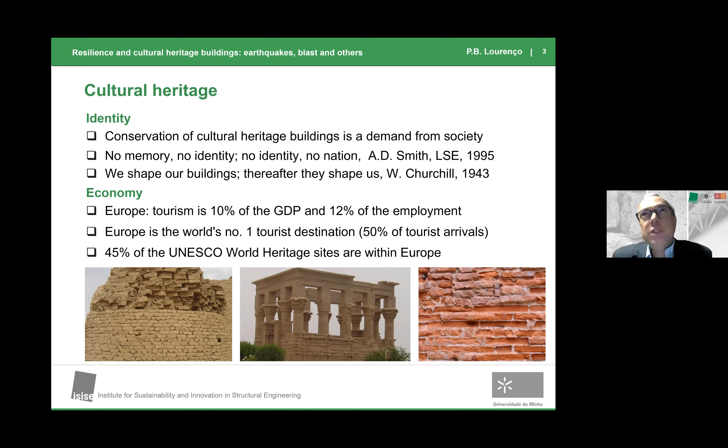Now, of course, we expect life to have a certain time frame, and buildings, particularly if they are not maintained, are at risk. Europe has somehow been the cradle of the theory of conservation and restoration, and of course there are many monuments and important heritage within the European area.

And this charter from the European architectural heritage states clearly that the heritage is at risk. At risk because of many things, including ourselves, because we are often destructive to the environment, including the fact that many of these buildings are obsolete, and because deterioration is intrinsic to life. Anything which is not maintained will eventually die.

Now, there are many hazards that affect our heritage. Many are natural, many are man-made. Of course, climate change is a major issue and depends where we are from. For example, I can tell you that we are working in an important building in Mozambique. They have a cyclone, typically on average in the last 100 years, once every 10 years. Well, in 2019, they had 2 in the same year. This never happened. And since 2019, they had 2 more. And so obviously some areas are much more subjected and will face faster climate change. Also, our destructive power is increasing immensely.

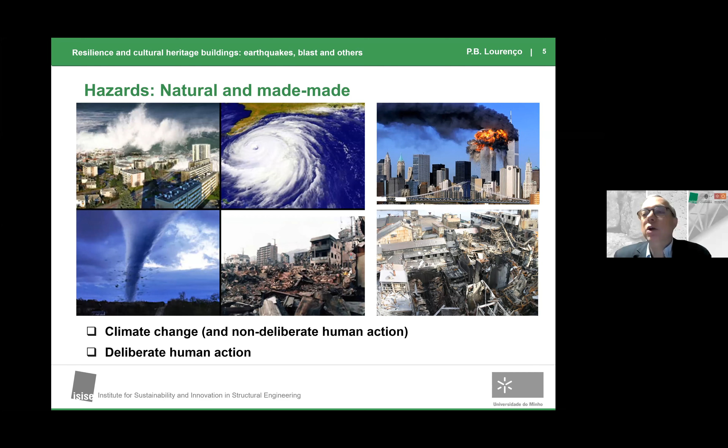Now, I think in the last years, maybe since the 90s, sustainability became the buzzword in our community and across society. I think two other words became very important in the last decade. One is resilience and the other is risk. And they are aligned together.

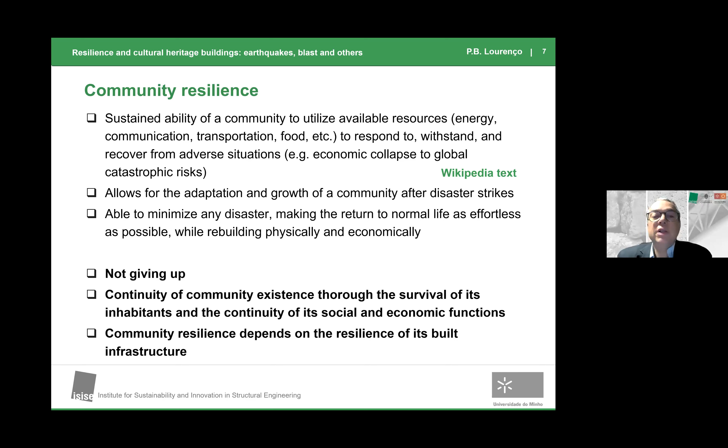Now, well, Wikipedia and the internet as an answer to any of our questions. Community resilience is defined there, and basically it has to do about not giving up, about a society being able to perform. Now, a society to perform depends on the built environment. And the built environment is not only housing, is not only the monuments. Cultural heritage is a small fraction. We're talking a hyper-complex system involving complex infrastructures, electricity, cell phones, gas, water, roads, anything you can think of.

Hospitals, schools, police. And so we have an important problem then where you have a major disaster, normally cascading effects occur, and let's say damage in one system affects all the other systems. And so we have to look at the built infrastructure in a very broad scope and thinking that our one system affects the other.

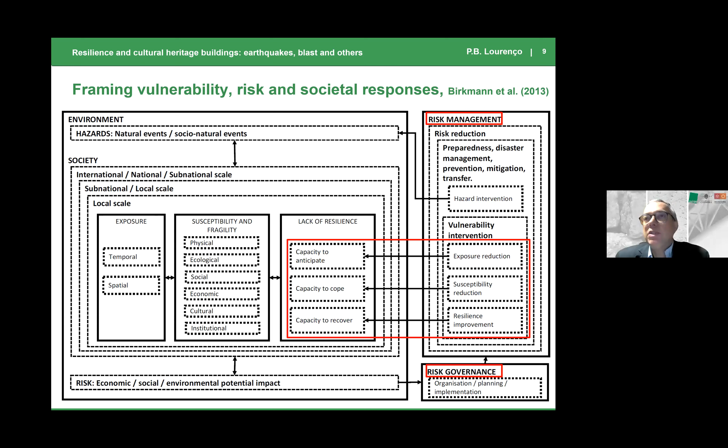And so here you have a link between resilience and vulnerability, the need to anticipate, to cope with the disaster, to recover from the disaster. And all about this is risk management, and something which is very important implies, as a society, risk governance. This means that our politicians, it means ourselves as a society, need to consider that in order to have resilient societies, we need to manage appropriately risk.

Now, risk is a very complex concept because people often mix risk with hazard, and people often present risk in a different context. Engineers, I am a structural engineer, try to look into risk as the product of three things: hazard times vulnerability times exposure.

It's very difficult to change the hazard. For example, obviously, well, you can reduce the earthquake hazard like you're doing, I understand, in your governmental buildings by installing base isolation. It's very expensive, it's probably impossible to apply to all the buildings. Well, we can change the hazard, obviously, for example, against flood or against blast by introducing protections. But in general, hazard is difficult to reduce.

We can also change exposure. For example, we can move people out of the building, limit capacity, and say this building cannot take 1,000 people, but only 100 or 50 or 10 at a time, so that people can escape. And if there is a strong event, you have lower impact. Or you can move, in a monument for example, the expensive statues, the amazing unique paintings somewhere else in a museum to protect them by reducing exposure.

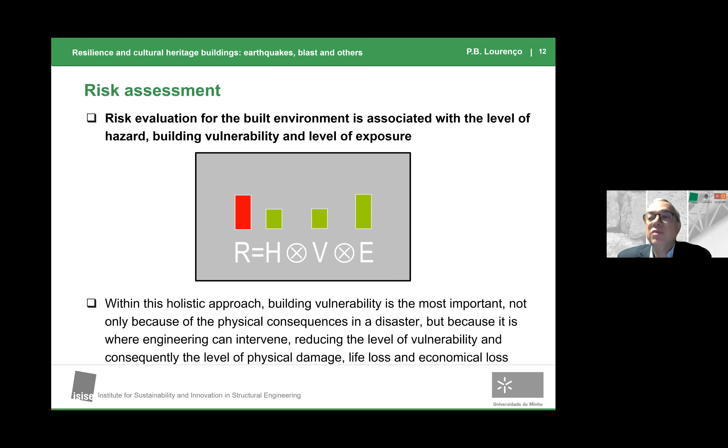This is exceptional. Most cases in engineering, we need to address vulnerability. And so reducing risk means reducing vulnerability. And there is an almost direct relation in this process. Now, there are many different tools, and you cannot use the same tool for a building or for a country or for the world. I will talk about this very briefly in a very fast way. Some of the slides I'm going to show you are extremely fast.

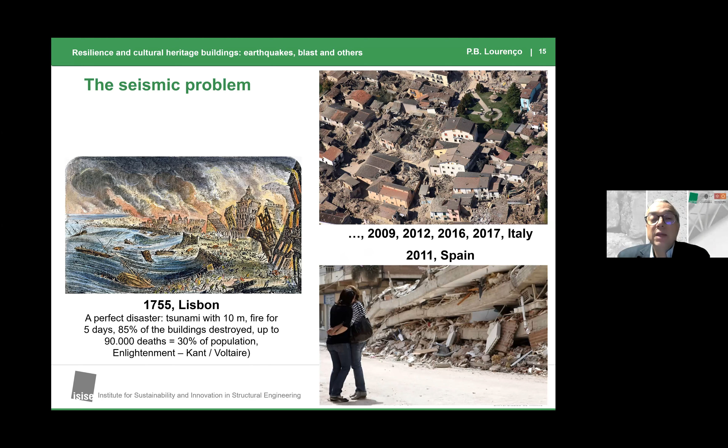Basically, what you can see is that we have normally rather poor materials. We have local failures because the material disintegrates, because it's not of enough quality. We have many elements that collapse out of plane because they are not properly tied back to something.

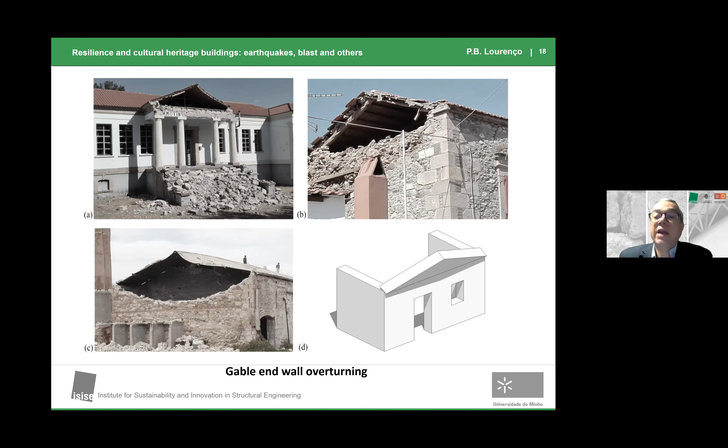We have areas of the building which are much more vulnerable, for example a corner. When an earthquake comes from both directions, you are pushing and pulling the walls at the corner, and this expels the corner outside. These are the typical failure mechanisms: buildings tend to collapse out of plane, killing people inside and outside, and this happens extremely fast.

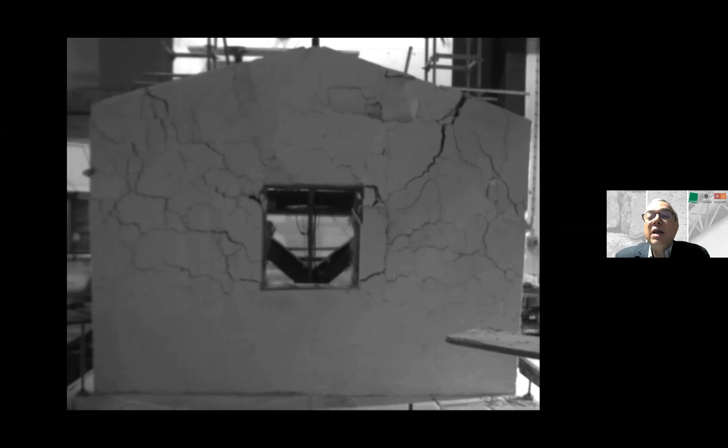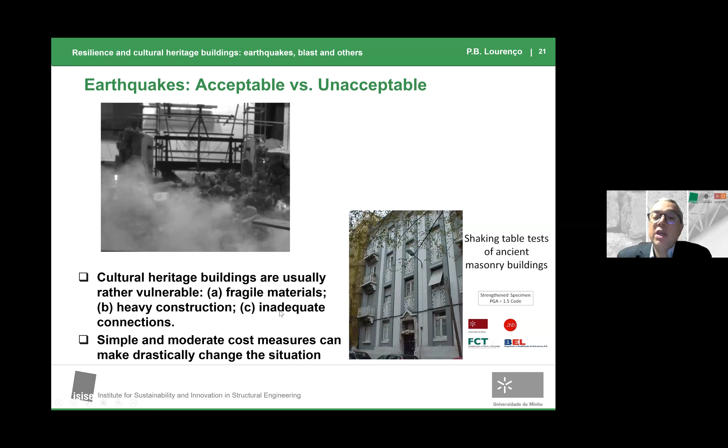If you have a very vulnerable building, like this example on a shaking table, and an earthquake comes, you have nothing. If you do nothing, because the building is heavy and fragile, conceived only for gravitational loading, you have a disaster.

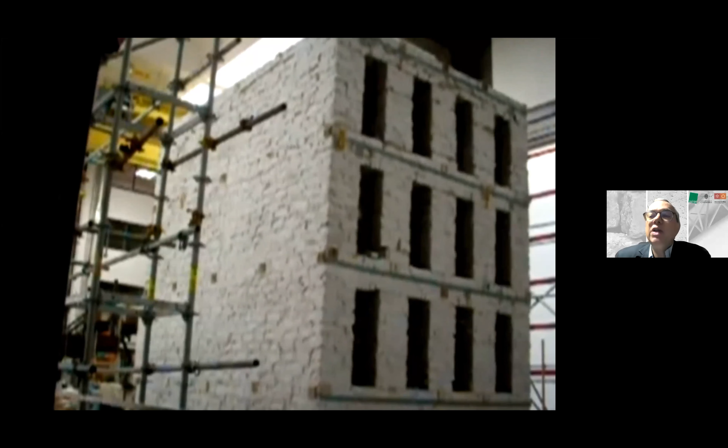It's very simple to do better. This building has been done better. We tied it properly to the floors, strengthened the floors very lightly, and made it much safer. This building was tested before and after repair, and we increased its capacity about double through a very simple, unexpected, and non-costly intervention.

Structural engineering is about saving lives and having an acceptable risk. This is a major earthquake, and the building is obviously destroyed—let's say not repairable—but it doesn't matter, because for this very large, unexpected event according to the code, the building survived and protected property and people inside and outside.

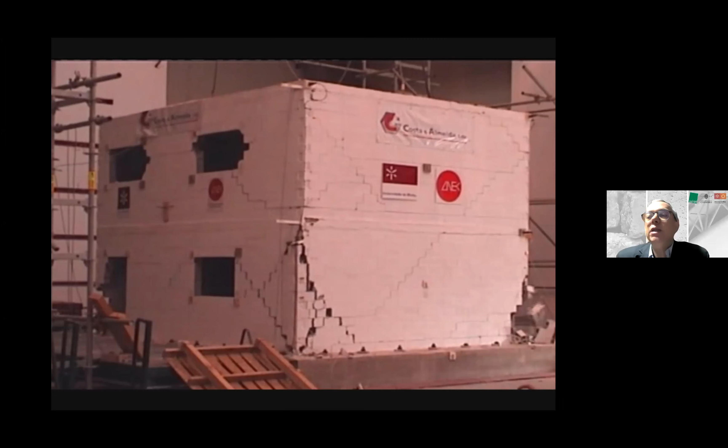Now, another type of extreme event is blast. Blast can happen because of negligence or because of a specific target action. Very fast loads can come from impact, from a boat, from a car, or from wars. This is an example of a test that takes a couple of milliseconds—it's a very fast test.

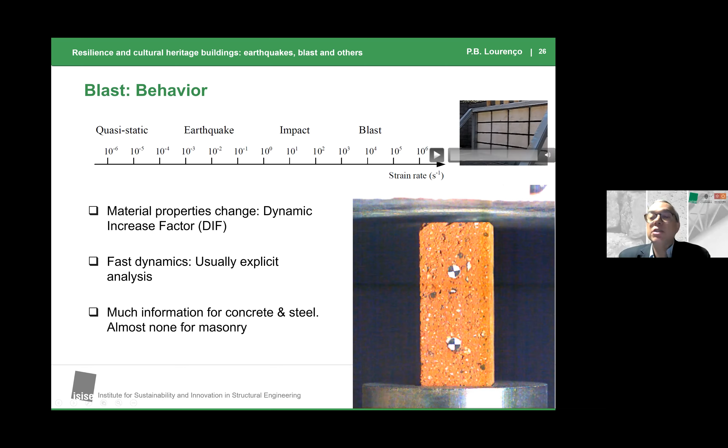This is very exciting from a structural engineering point of view, because anything you know about earthquake engineering and static loading—loads that change very slowly—you cannot use. You need to change everything: your tests, your analysis tools, and the way you think.

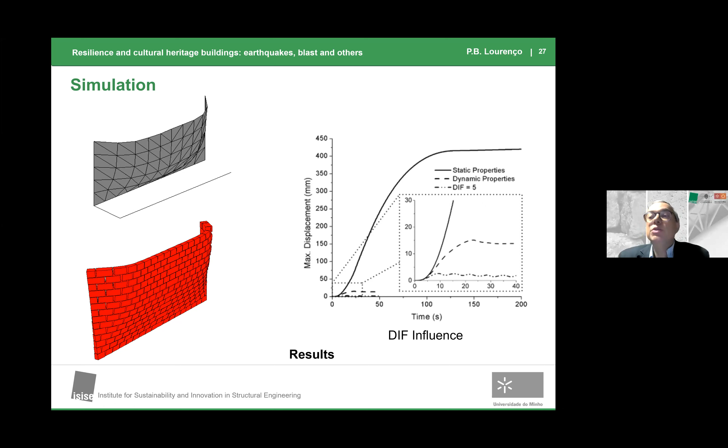For example, this is a famous factor in blast analysis, an increase factor taking dynamics into consideration. Taking the static properties normally used in structural engineering gives you the black line. Changing to the correct properties changes this line, where there's a permanent deformation in this wall of about 15 millimeters. Changing to totally wrong properties gives no deformation. So the response is extremely sensitive to the speed of the blast and how the building and material respond to this speed.

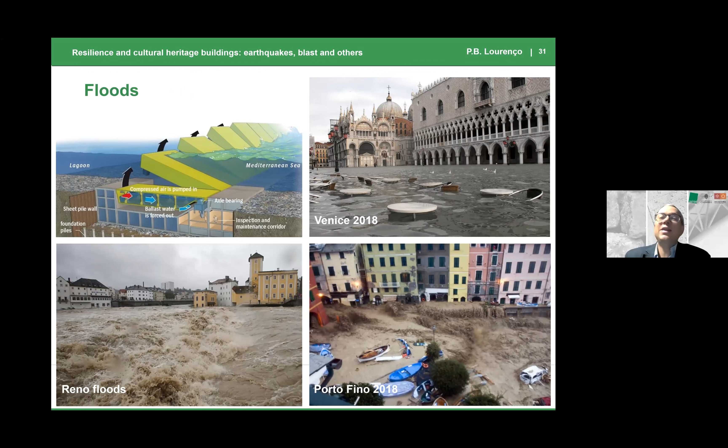Now, earthquakes are not the most expensive disaster, but they are the ones killing more people, and they tend to kill people very fast. If you have 200,000, 1 million, or 500,000 people killed within a few minutes or hours, this is not acceptable for a society.

So we have to do something. It's also very interesting to see how society responds to some of these things, because society in general believes landslides are not a big issue, or floods, or fires, or earthquakes.

But they think, for example, terrorism is a major risk. Here you can see a barometer in Europe saying that 90% of the population believes terrorism to be a major risk. And you can see that the chance you die of a terror attack is very similar to the chance of being struck by lightning. And nobody is concerned about being struck by lightning, okay?

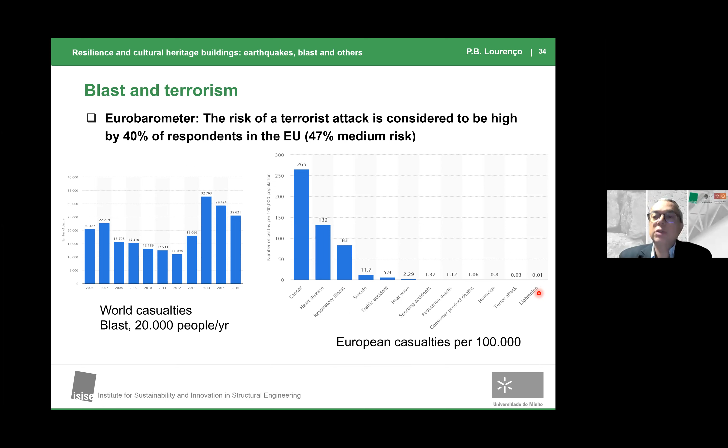So you can see how society, all ourselves, respond to social media and incorrect perceptions of risk and incorrect perceptions of threats. Now, another important issue, in my view, from the engineering point of view, is the economics.

And disasters tend to be terribly expensive. When you have a problem in your house, this becomes your problem. When you have a problem in a major disaster, this is a societal problem, meaning we all pay for it. Anybody who is a taxpayer is going to pay for it. And this is becoming impossible to pay.

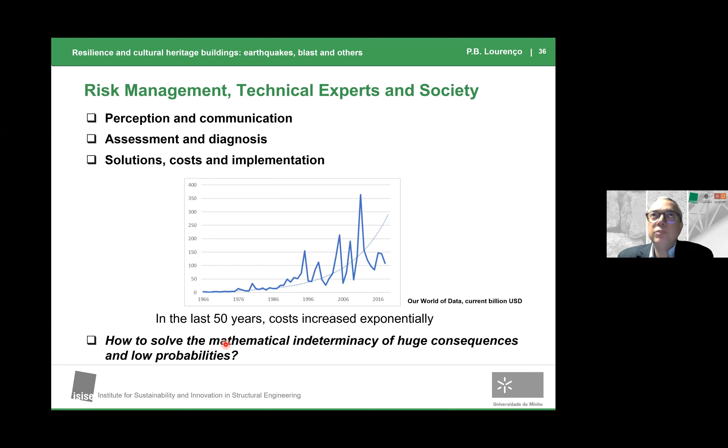So we need to do better in protecting our world heritage, in protecting our societies. We are failing to address the increasing exponential costs of losses, okay? And we have to solve this very complex problem from an engineering or mathematical point of view, how to combine a very low probability or values close to zero with huge consequences, which means costs and losses close to infinite. And so this is an indeterminate problem, very difficult to somehow transfer the information to society.

Now, the good news is, from the engineering point of view, we know a lot. I think that in recent years we progressed in traditional materials as much as we know for modern materials like concrete or steel. I think we know almost everything at all scales, from the nano to the super big.

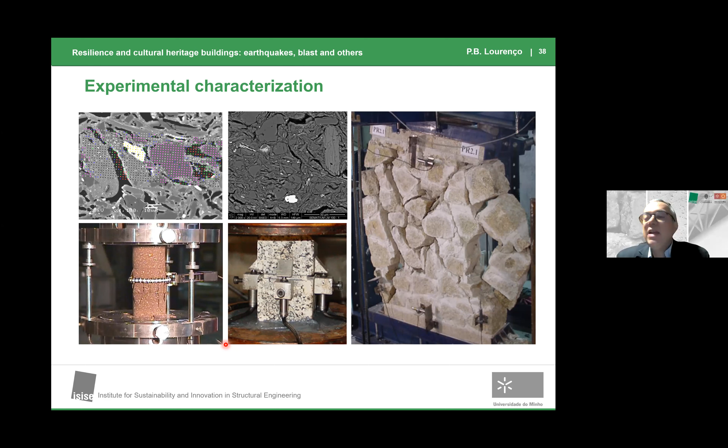We have amazing tools today with drones, with laser scanners, with inexpensive, easy to use, amazing software that allows me to get the 3D model very fast. We have amazing tools that are very similar to what we use in medicine. We can sense a building that our hands cannot sense. We can hear a building, we can see a building that our eyes will not see. So we have amazing tools that allow us to characterize the condition.

How good is the building? We have more and more inexpensive tools to monitor. Everybody has an accelerometer in a cell phone. This is why the phone knows up and down, or where north is. And this is very inexpensive. You can have a triaxial accelerometer for a minimal cost.

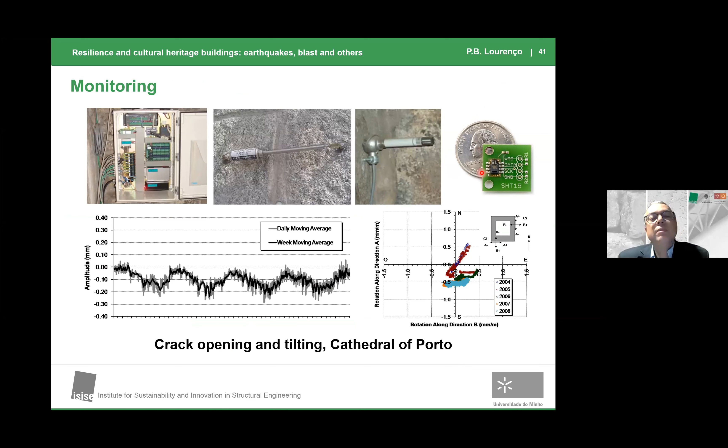And we have amazing tools to simulate in our computers anything we need to simulate. Sometimes we don't have enough data, it is true. Sometimes we don't have enough money to study carefully. This is also true. We have to make choices, okay? But this is pragmatism, this is engineering. Engineering is about making choices, okay?

And we have new exciting materials that are appearing every day. Sustainable materials, new materials that did not exist several years or decades ago. And so what we try to do today in structural engineering of the built heritage is to combine empirical evidence, things which are more on the qualitative side, and our experience from observation, with hypotheses that we put in sophisticated models to come to a conclusion.

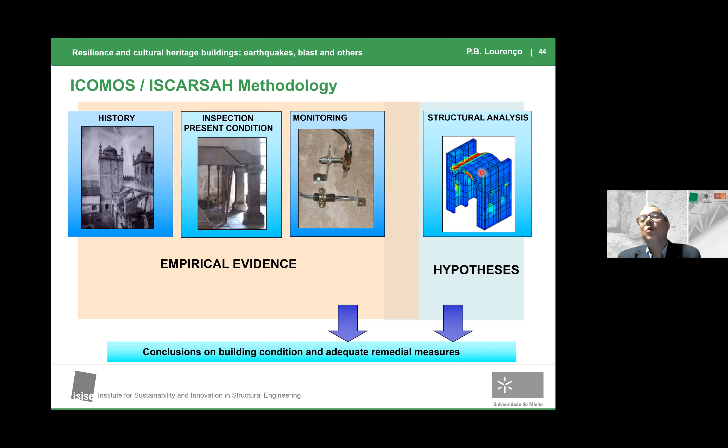And this is quite different from modern engineering of modern buildings, where everything is known, or most of it is known. In an existing building, a lot of it is unknown, meaning we have to address uncertainty, meaning we have to consider things which are based on our experience, based on our judgment, okay? So we have basically 3 steps: understand the building, understand the causes, address safety, is risk adequate or not, and then design measures if necessary, okay?

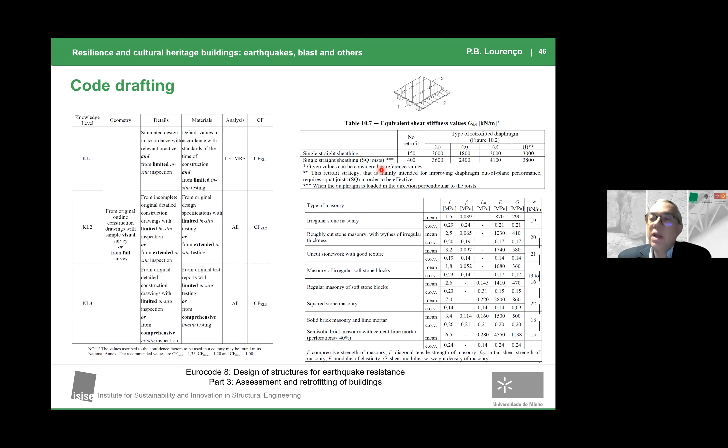The good news is that the codes are going in this direction. We have a lot of information available. I'm putting here an example of the new code coming up in Europe in the next 2 or 3 years for existing buildings. Everything is there. We have information about traditional materials. We have complex information on how, for example, a timber floor works. So there is information available, information we can use safely.

Now, there is also a lot of things we don't know because they are complex. And this is why we still need research. And of course, why research makes sense, to contribute to what we call a wealth-based society or a knowledge-based society, and to innovate, bring new products.

And this is the base of a very large project that we're running now in my university, where we gather the best experts in the world, I believe, or some of the best experts, and we ask them to do a blind prediction on this building.

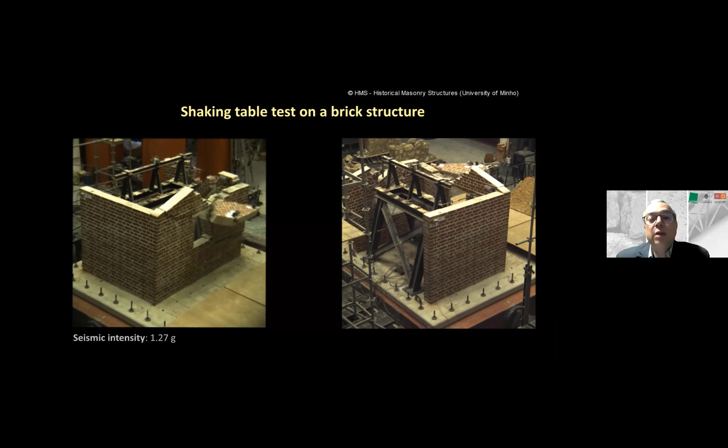It looks super simple, and it is simple. It's one facade, two return walls. You could see there was an earthquake, there is a shaking table moving, and you could see that failure is extremely fast, it's really fast. It moves and it collapses.

Now, if you look at failure in slow motion, things are a little bit different, and it's really amazing how this behaves. You can see that it starts to go inside, and there is a beautiful V here going over the lintel, okay? So there is a crack, and this part is going inwards. Like when you brake, your body goes to the front in your car. When you accelerate fast, your body goes to the back.

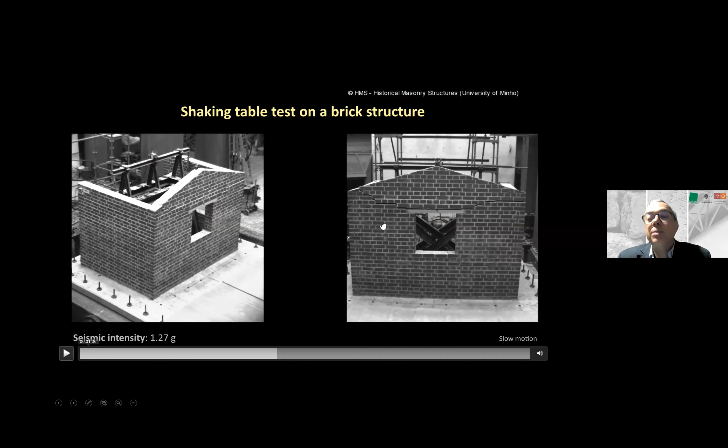This is an inertial force. So this part, the gable, is going backwards because of inertial forces. Now, when you continue, it's going outside, you can see the V maintains, it's almost collapsing, not yet. Then the V opens again, and now it's going to collapse almost all, but no. And then in the end, it only collapses a part of it, and it continues.

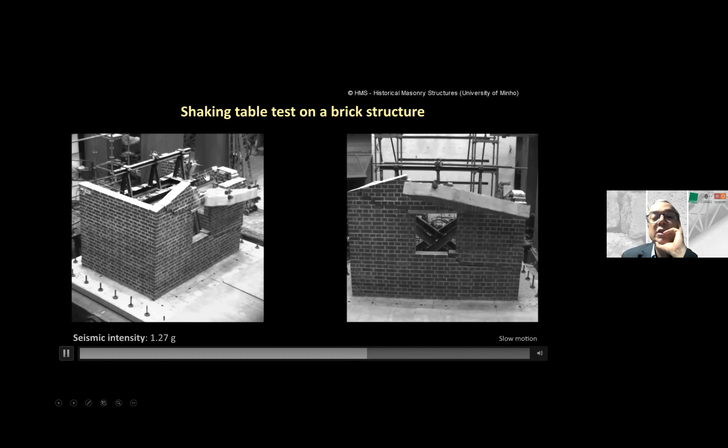And when it collapses this part, it also collapses the back, as you can see. Oh Jesus, doesn't matter, and it's super fast, okay? So the end point is that it collapses the front, the back, and it's super fast. The pier almost collapsed, but it's not collapsing. And this part is going to collapse next.

So as you can see, this is a fraction of a second, and it's very brittle. Something structural engineers hate. We want ductile failures, failures which are safe. We tell people this building is unsafe. You can prop, you can do something, or you can run away.

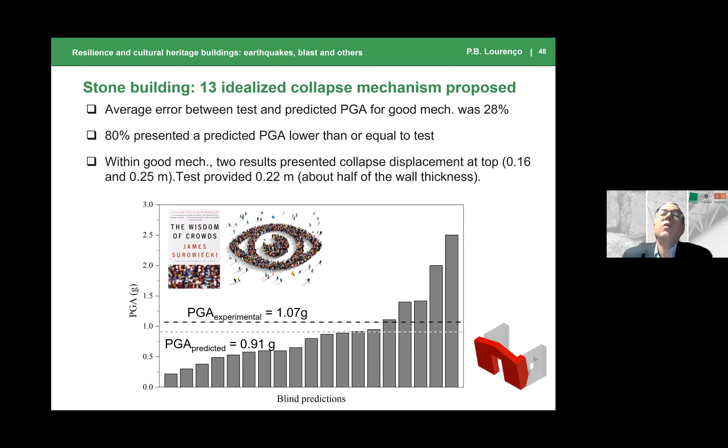And so this is very difficult, even from the mathematical point of view. As you can see, the experts were excellent on average, because the average is very close to the experimental, but they were a nightmare in terms of predictions. It's not really a nightmare. The good news is that most of the experts, 80%, predicted safe solutions. And so engineering is not perfect, is not in the case of dynamics of these very brittle responses, but we are on the safe side. But we need to know better.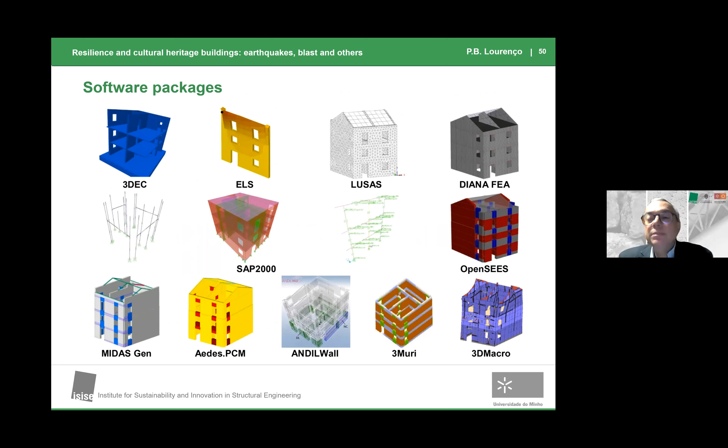We did another example. This is more professional oriented. These are several commercial softwares, several of them widely used in engineering, SAP 2000, OpenSees, okay? Others less used in engineering. And we tried them to analyze two buildings. The results were not very good.

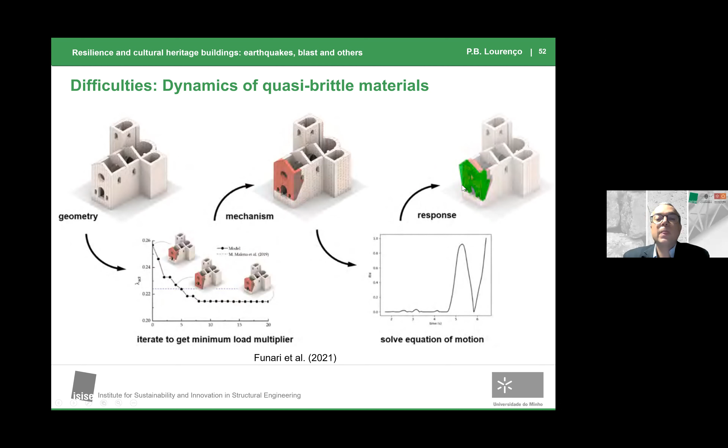This is the way we're trying to go in the profession. We would like to have mechanisms that change this complex system to a simpler system, and then we apply dynamics here. And here you can see the difficulties we have from the engineering point of view. This is the code application of dynamics of these systems.

The codes in Europe allow that you adopt a force-based or a displacement-based approach. Problems: a force-based approach is dumb. It doesn't consider the scale effects, and so it doesn't matter if the building is small or very big. And if you use a static approach, the response is always the same. We know this is profoundly incorrect. And in dynamics, if you do it displacement-based, the capacity of this structure depends on its size. And so a small structure and a large structure have different safeties.

Now, interesting aspects also. If I go back to this building and now instead of doing a code-based analysis, I use random earthquakes, both of code type or based on databases of earthquakes across the world, so that on average, I try to replicate the code, I see very nice things.

And the very nice things are, again, we are predicting on the safe side, because I'm showing you here that all these predictions, the black and the white, doesn't matter so much. They are all on the safe side. Very few predictions are unsafe according to the code. No prediction was unsafe if I take the real failure of the building.

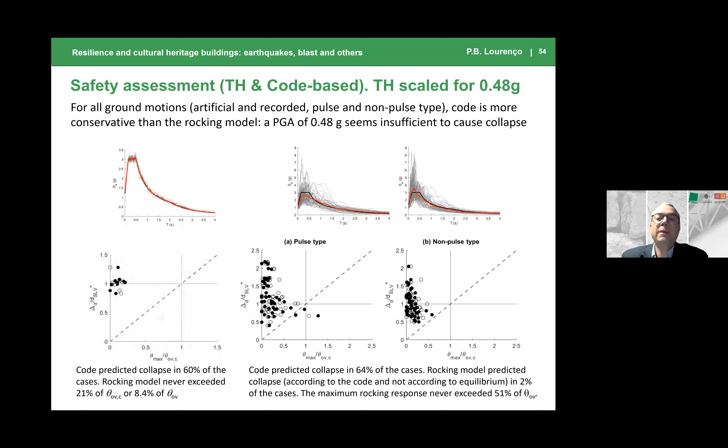Again, we have problems in dynamics of these types of buildings. This is a church we work on in Cyprus. Well, this is a bit sophisticated. I don't want to go into any sophistication.

We did the measurements in the building. We did the model that replicates the existing building. We applied the code, and by applying the code, we are able to calculate what is the target displacement for different scenarios: almost no damage, the standard damage of the code, or full collapse. So this is a code analysis, and this is a more sophisticated time history analysis, the best representation of the earthquake.

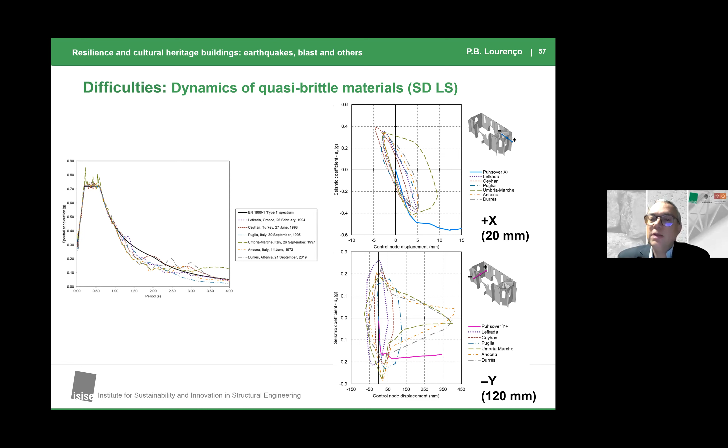You can see that the code will tell me 20 millimeters here, and 120 here. As you can see, at the peak I am at much lower values, so again I'm on the safe side. This is good if I'm on the safe side using more sophisticated tools, but this remains a true challenge for structural engineering.

Dynamics are really complex. Now, I try to somehow balance our activity between research and practice, and research is supposed to feed practice. Of course, many things we do in research we cannot apply in everyday engineering, okay? We are lucky to apply very sophisticated tools in very sophisticated case studies.

This, for example, is a building in Isfahan where we worked. It's an amazing building. These double domes, of Persian origin, are extremely famous from the point of view of building technology, shape, and architecture. You can see it's a bit of a complex structure because you have...

...these stiffeners inside. What you see here is a masonry stiffener, these elements. The masonry stiffeners are critical for the response. If you don't have it, the structure is rather...

...unsafe. You can also see that the conception of the space is very different from what we often associate with the Western world. We tend to have super huge buildings that impress from the outside, so you have a demonstration of power, but then the building also impresses you from the inside and makes you feel very small. Whereas in many other cultures, this is an impressive building from the outside because of the scale, but inside they are very small.

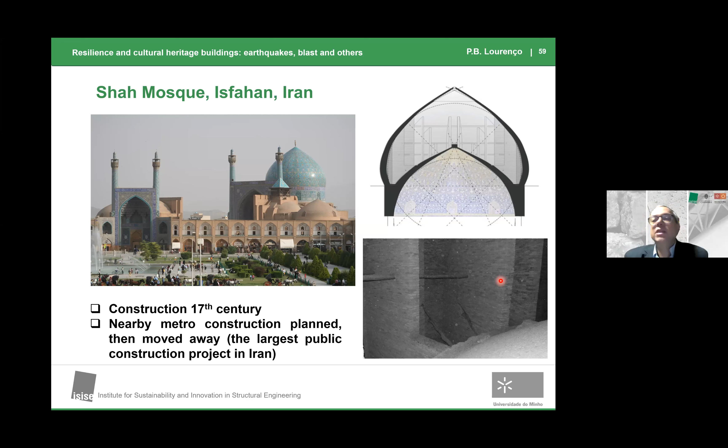This is another interesting example where we worked together with Professor Mario Santana. I think he's here, I'm not sure, it's a small photo, but I've met him in many places across the world. This is a very interesting aspect in earthquake engineering.

There was a low or moderate size earthquake in 2016. As you can see, it was minor, very few buildings damaged, okay? Four people killed, which compared to very large earthquakes with hundreds of thousands killed is a relatively small human loss. For those more linked to earthquake engineering, you can see some accelerations, and they are super small—0.08G, which qualifies as a low earthquake, okay?

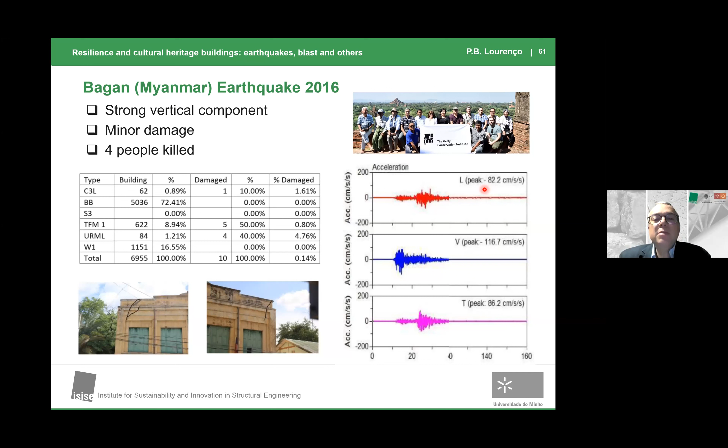But the impressive thing is, if you haven't heard about Bagan, Bagan is the temple valley. It has, I think, over 3,000 temples in the valley.

There was a huge destruction. And even though there was very little damage in most housing, the temples suffered huge destruction. Why? I believe because of dynamic amplification that affected only this type of building. Again, you can see why dynamics are so complicated.

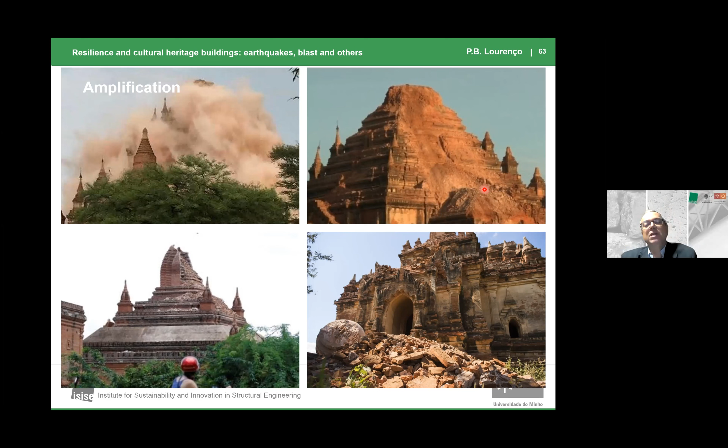If you do statics, you'll never get this, okay? These are some studies we did to try to discuss the failure of these buildings, with many measurements done on site, to see how it could have been possibly strengthened.

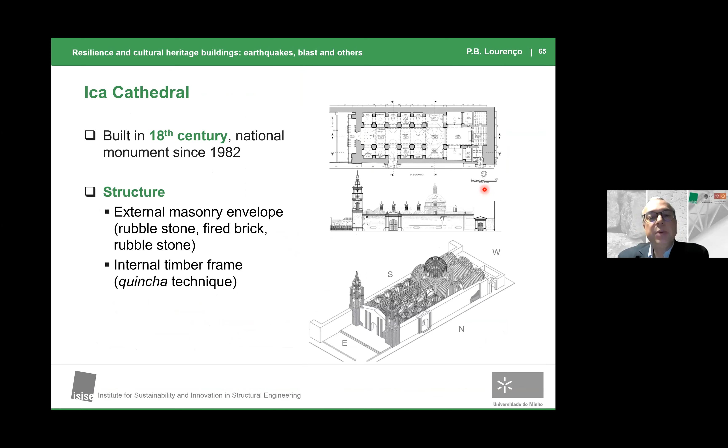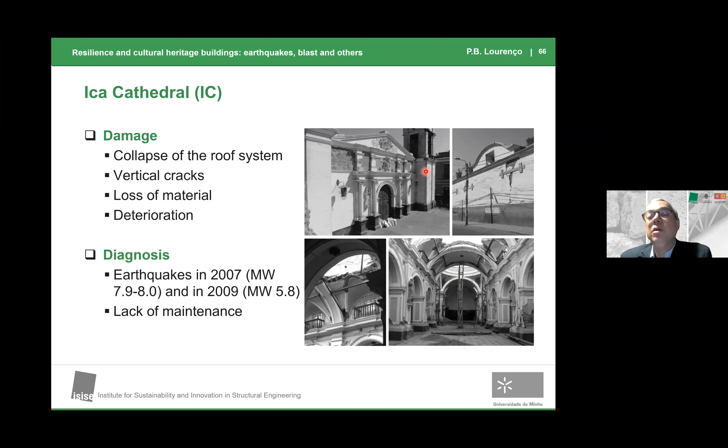Another example of a building that is going to start strengthening, I believe still this year, is the Ica Cathedral in Peru. It's a building that suffered 2 earthquakes, quite strong. There was a lot of damage, so the main vault basically vanished. The dome basically disappeared. The tympan is totally strengthened because it had major cracks.

But people here asked me one of the most difficult questions I've had to answer: why do you want to convince us that we should repair and use this building, which clearly is not safe? And why shouldn't we have a new building, which is as safe as all the other buildings that we're making now?

It's very easy for anyone to say, well, you can use the building, I'm doing it, I go away, it's not my problem. But the question is different: can we accept people to use buildings with a very low safety level? My vision is clear. No, we have to accept a minimum level of safety. Otherwise, we cannot be responsible for the building.

So we did our best, and we believe that this building has a more than acceptable level of safety for modern use. We made many simulations. The interesting part is we are able to move from the unstrengthened model, which has this very fast collapse, as I showed you before in the video - this will collapse, and then part of the building will collapse - and we can move it to a building that has a global behavior where damage occurs if there's a very strong earthquake.

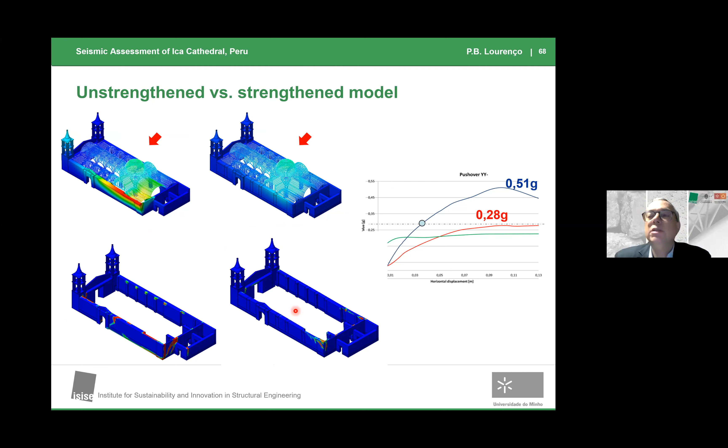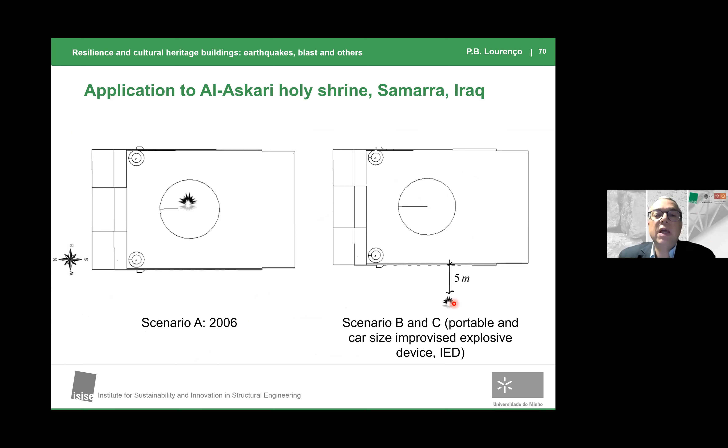This is another example of a building that we worked on that was attacked by blast twice. What we tried to do was justify the damage here, and we could justify it. Then we defined the minimum distance we have to ensure for the building to be safe. It's impossible to make the building safe to anything, but you can make it safe for a car-size explosive by providing a certain distance to the building.

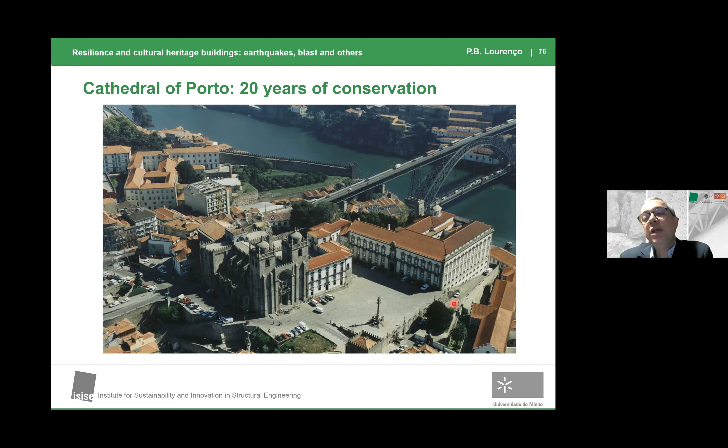Now I'm going to show you fast a couple of applications. This will be a video, so super fast. This is the case study I worked longest. I presented when I was in Carleton. It's the cathedral of the city I live in. It's a very interesting building, has been around for 800 years, of course, with many changes.

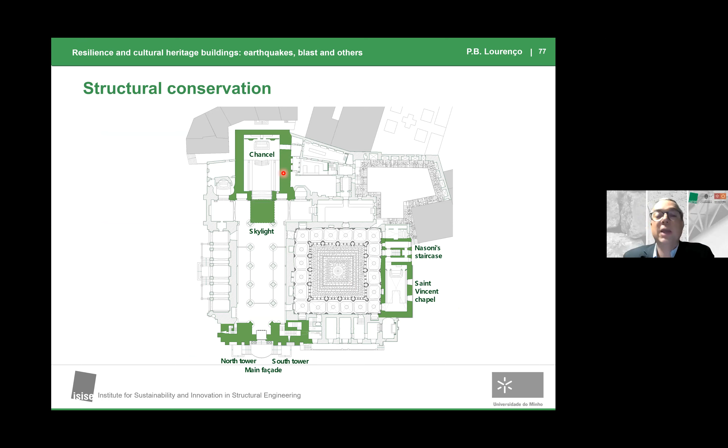We have been lucky to be sort of appointed as the structural engineers, and we worked on many different places across the years. The last works we did were here, and I mean, last is really last year, so it was super recent. I'm going to show you a few examples very fast.

So this is some inspection of the towers. This is the constitution of the walls - these are very thick walls, about 2 meters. The walls are made of 3 leaves, and so there is a big core, and the connection between the external leaves is impossible - they are too big, and so it's very bad, in fact.

There were huge cracks. This one is 25 centimeters, I can put my hand, my full hand inside, and I don't reach the end. There are many cracks, a lot of bulging, ties broken from the past, and continuous movement, because we can compare with old photos. So the situation is not very nice.

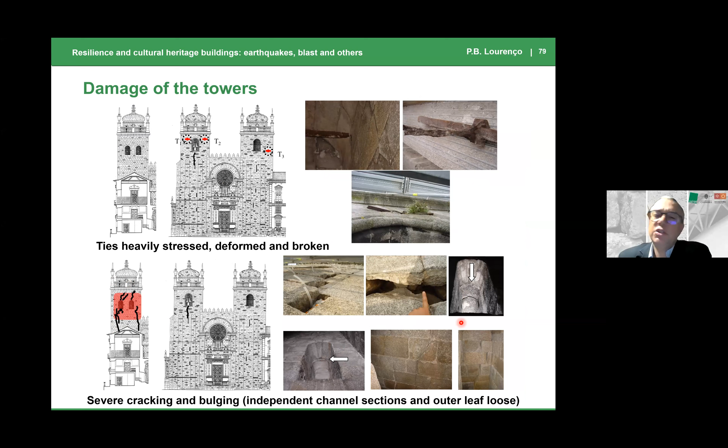We introduced a system of internal rings connected by ties to the outside, so the system is partly invisible. There's a few crosses in this wall that was a disaster, and a few plates that are visible. We tied the wall from inside, and we tied the tower from inside.

These are some examples of the execution, I won't go into many details. These are modern materials, all stainless steel, the most expensive, with injection tubes to inject material inside the holes for proper bond. What I found amazing here is the Lego-like construction an engineer has to think of. It's easy to put in a drawing.

The problem is how we're going to build it. So we designed a system where the parts were small enough to go through the window or the door, and it could be built inside without difficulty. Everything was pre-designed, everything was bolted, there was no welding on site, zero. These are some details of the execution of the elements.

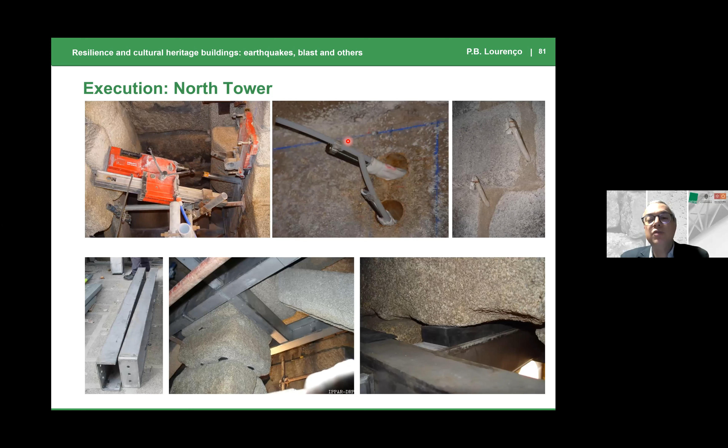I liked this book very much because, you know, he is now the Patriarch of Lisbon, one of the few cardinals and patriarchs of the Roman Catholic Church, a very important position. And he loved very much the crosses of an engineer, and he put them in his book. So I think our things should be visible, and of course, they should be pleasant.

Now another example of our detective work, briefly. This is in the same building, the skylight, which is a bit damaged, not going into details. There's a few cracks, a little dangerous too, because there's no support for these stone slabs. The detective work here is, why do we have this damage?

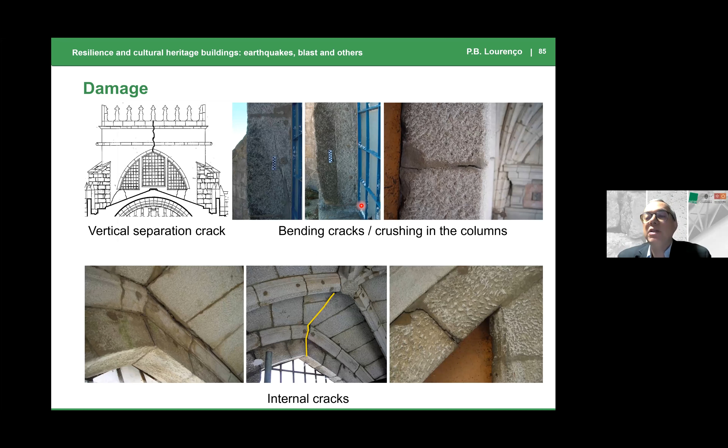We did many analyses: self-weight, no damage. Additional infill, because there's a lot of rubbish people put in buildings if nobody sees, no damage. Temperature effect, almost no damage. So where is the damage coming from? This is what we have to do as engineers of the built heritage: detective work.

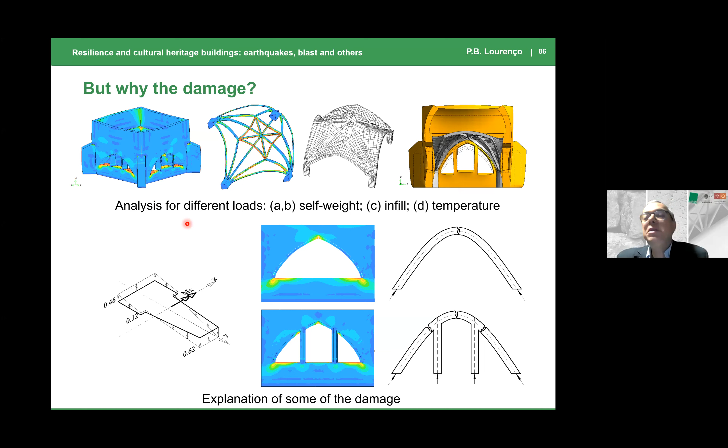Then I started thinking, this is not the problem of the transept, this is the problem of the building. In fact, because the foundations are poor, the problem is the foundations, and it is the foundations that destroy the upper part. Once we know this, it's very simple to decide what to do.

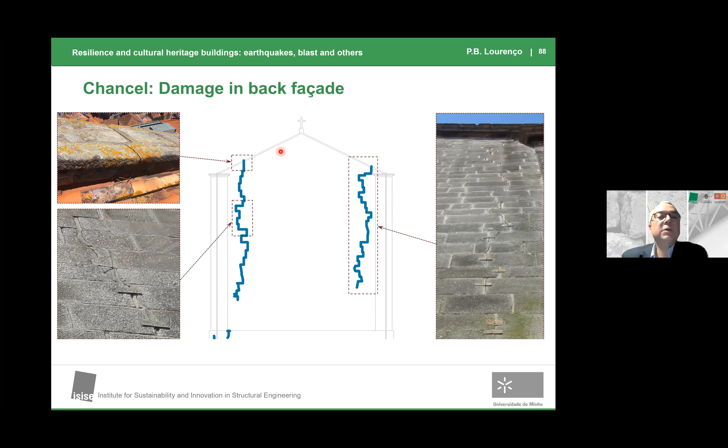Another example of our difficulties. This is the damage in the back facade, it was our last intervention, moderate size cracks, previous repairs. Well, some of the cracks in the vault are not so moderate, a lot of damage. We did some mapping of the damage and found some complicated stuff.

I'm not going to talk about that, I'm going to talk about complexities. I'll show you two complexities. This seems super simple, we are designing a truss, any second-year student can do this. But it's not that simple. Why not?

Because the space we had to work in was minimal, because we had to comply with the existing level of the roof. We wanted to remove load, so we had to clamp this on this side, and this is the clamping system. We had 2 centimeters of space to work with, and we had to be sure we weren't adding load to the vault.

Even though this looks super simple, I can tell you it took several weeks to do a very, very simple design. It's not so simple. It was built in 2 pieces and brought in by a crane.

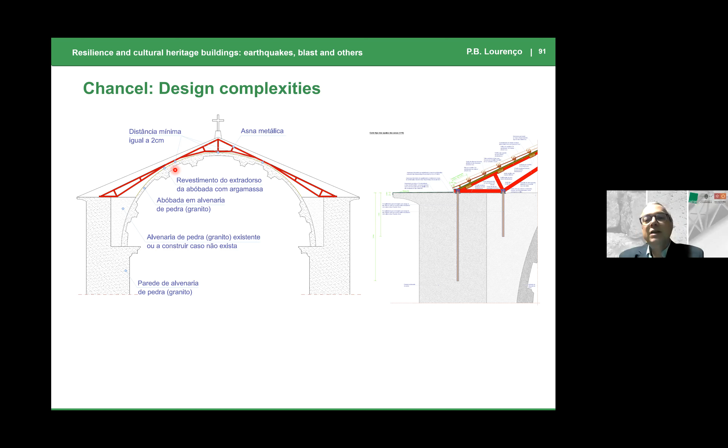Another example of our difficulties. This is a church we worked on in Kuñotambo, also in Peru, finished a couple of years ago. I was there with Professor Santana. There's a lot of damage because of deterioration, damage due to earthquake, and damage due to soil. We did a sophisticated model, and our model predicted the existing cracks, super nice, validating the model. Then we did an extremely complex intervention together with Professor Torrealba, and you can see all these timber connections inside the adobe.

So we're using traditional materials, only timber, only earth, but properly. And then there's a few nice details.

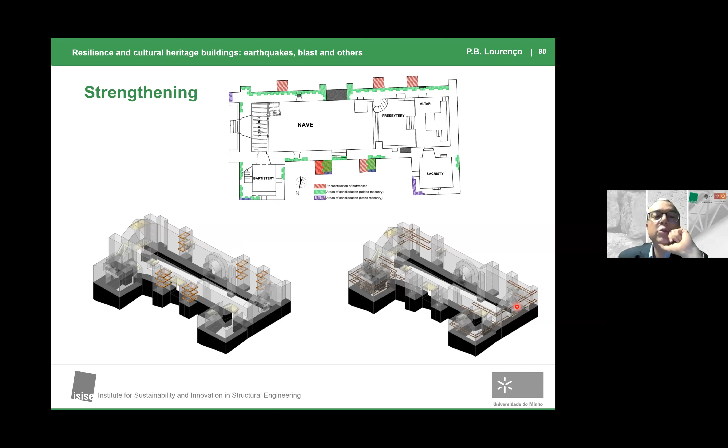For example, you don't see this much. If I want to tie the roof, I need some anchor keys. In many places you see anchor keys outside so that the tie works. But I want a special tie, one that works as a tie but also as a strut, because when the earthquake comes, I need a strut. So I have to put anchor keys on both sides. If you fail to do this, it's not going to work.

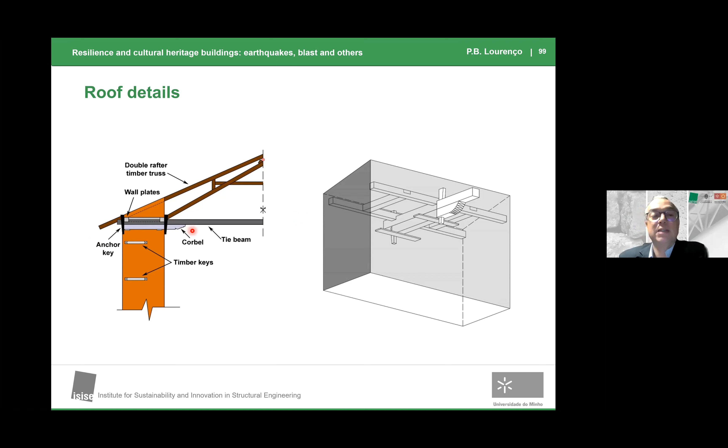It's a disaster. So again, what we tried to do was move from this very brittle, very local failure mode to a global failure mode where everything works together. There are many technical, interesting details, but I'm not going to speak about this. These are some photos of the works done.

I'm going to show you this. This was another similar church that had been repaired. In the week before the inauguration, an earthquake came. It was a local earthquake, and you can see the condition. The works were not done properly.

It was not adequately tied, not sufficiently keyed. For example, this is a disaster. It's a basic earthquake engineering error or structural error. You cannot have a buttress, this is a buttress, connected to a wall without tying it.

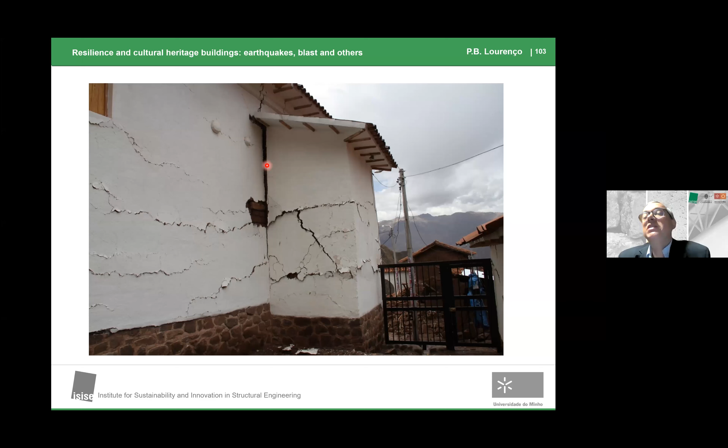You need to tie it carefully, like we are doing here. If you don't tie carefully, the buttresses are not working together. If you don't tie the corners properly, it's not working together, and you have a disaster. And so this is not what we want to do.

Okay, another example, very simple. I have a few examples, very fast, I think I have about 10 minutes. This is a very important monument. You have the tombs of many kings in Portugal, and many reliquaries from many saints across Europe. It's a very steep roof. We worked here on this roof.

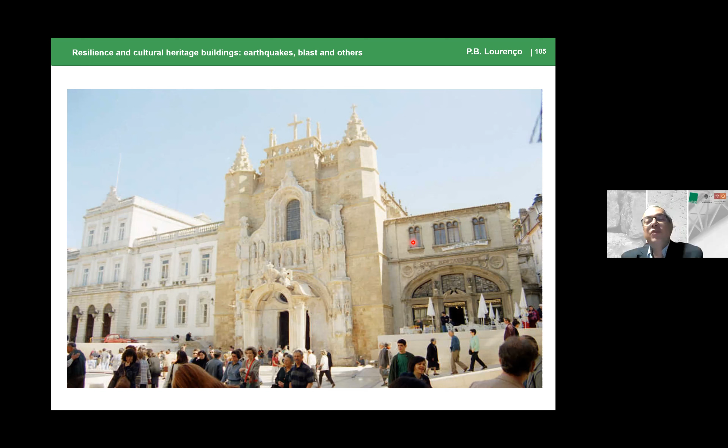The roof has inside a vault or cupola. If you have this inside, you cannot have tie beams. A roof works beautifully when it has tie beams. If there's no ties, you have a lot of thrust. Okay, so there was a bit of damage, and we tried to keep the roof.

So we tried to install a few new parts and do some repair. But the owner and the heritage authorities said, forget about it, we repaired this roof 20 years ago, we still have a lot of damage in the vault, we don't want this roof, let's put a new one. Here you can see a huge deformation in addition to the attacks, and you'll see it next. It was a good decision.

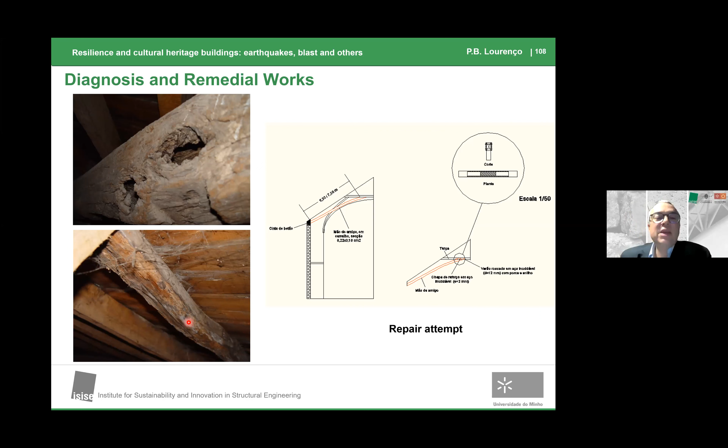So something that looks super simple—anybody can design a timber roof, simple—I can tell you, a couple of months of work, super difficult. Because I have something inside, the geometry is predefined, these are huge spans. If you're a timber expert, this is 15 meters, this is about 13 and a half meters.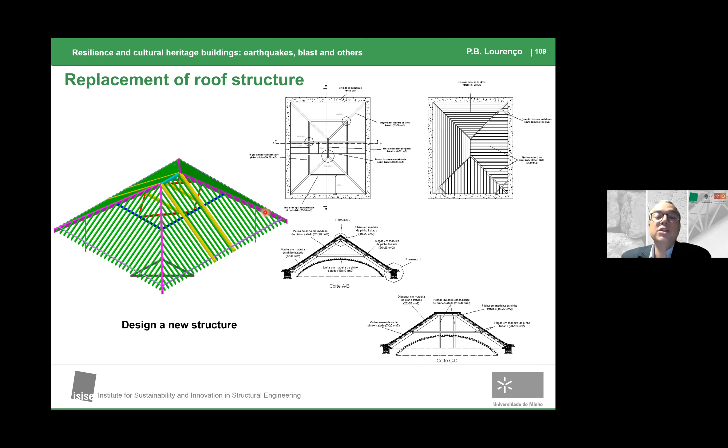We did even another trick, which is interesting. We put the thrust or reaction of this very big truss, not into the wall here, and we put a steel element along to move this thrust to the sides in order to reduce the bending moment of the wall. Very simple, but we put a new steel element to move and transfer, let's say, keeping the shear but reducing the bending moment of the wall.

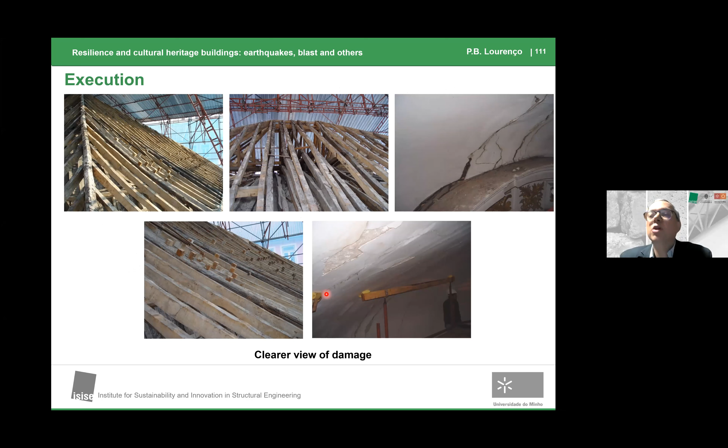Okay, very simple design. This is, you can see the huge deformation. So there were many past repairs in order to be able to accommodate, and this was deforming, destroying the vault inside, really destroying everything. So these are the executions. This was all made with solid wood, no CLT or laminated timber, but it is what it is, it could have obviously been glulam without any problem. And these are some details of the execution.

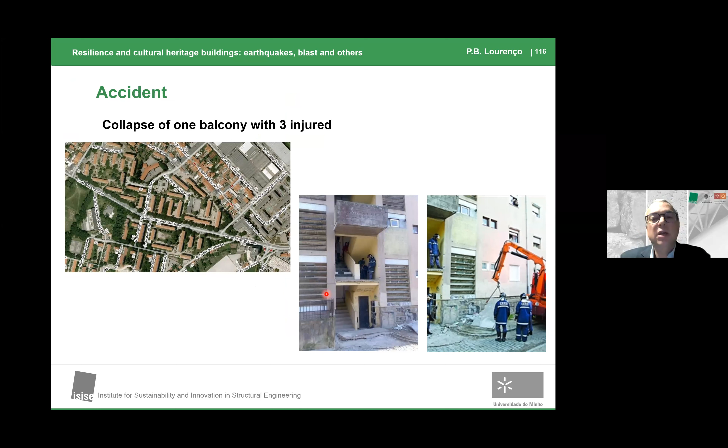Now I'm going to show you another example of complexities. This is a reinforced concrete element that collapsed. It's very simple, it's a cantilever, but in this very simple thing we have about 50,000 people living, because this is social housing, all built in the 60s or 70s.

There's a lot of problems, including wrong RC construction, deterioration, etc. Now the interesting part here is the relation with society. The TV was there, the newspapers, the mayor was mad. They had already invested a lot of money rehabilitating these buildings, but this was all painting and changing facades, and very little on the structural, nothing. And so they asked for immediate action.

I said I'm not going to do anything before we study. If this has been around for 50 years, the risk is very low. If there is another event, you're going to prop everything tomorrow, okay? So we have an initial budget of 10 million for only strengthening the balconies, and in the end we do it for $1.5 million by studying and doing it properly.

So we develop a testing plan. In some buildings that are being repaired, we installed immediately a very simple strengthening with new reinforcement, and that's it. This is super inexpensive, super easy to do. There's no reason not to do it if you have doubts.

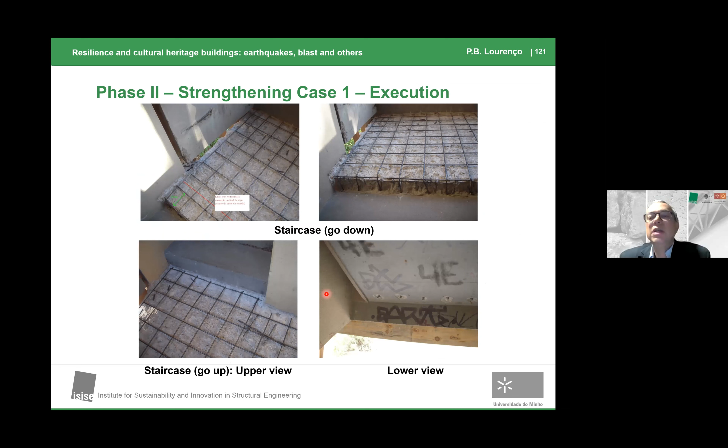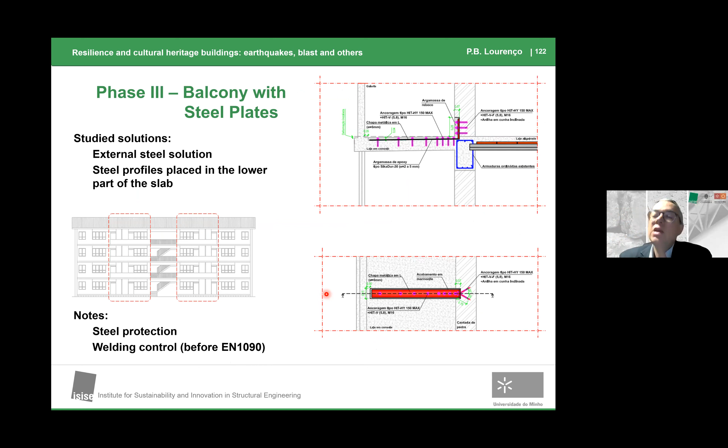And then we have complexities because many of the buildings had been repaired, and so we had to do many things, there were many complexities. Sometimes we put things from above because this was possible, sometimes we put things from inside because this was the easiest way, with no interaction with whatever was already finished.

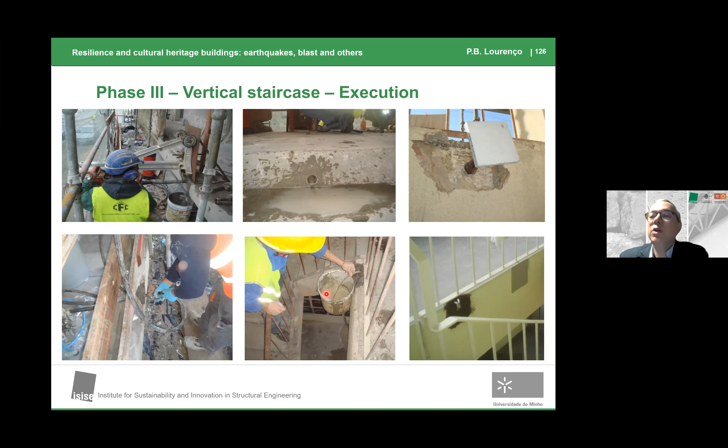So this is, I think, interesting to show you the ability we have to do complex works using modern engineering. We can do things which are invisible, we can do things which are visible. In this case, the cheapest one is to do it visible from below, but normally we cannot do it. When we could, we did, and it's beautiful actually, I think it looks very nice. This is the cheapest, and when we could do it, we did.

Now I end up with another type of approach, because I told you about different tools at different scales. These are some examples of studies we have been doing at territorial level to manage risk. In this case, if I have here a vulnerability index, this means this building is vulnerable, and this means that for a given earthquake, the red building will have a lot of problems. The green, no problems, the yellow, some problems.

Now, I do not care if I'm doing a city or world scale study, if this building is yellow, I don't care if this one is red. I do care how much money I'm going to spend, and I do care about understanding the vulnerability of the territory, but not individual buildings. So I want to be correct on average, I don't need to be correct on the single building. I use very simple tools.

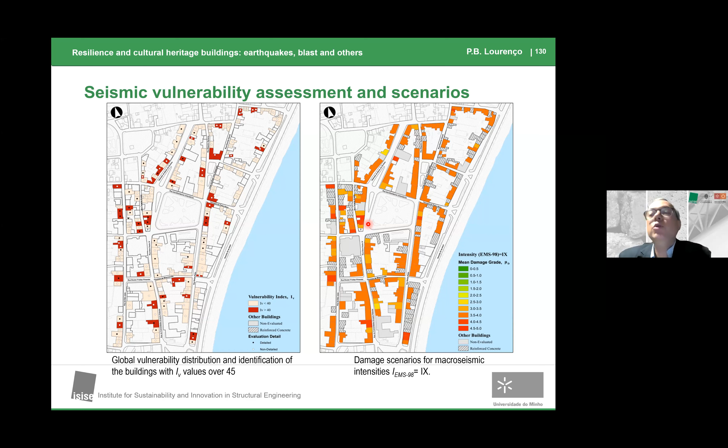And I can do this that we use for planning. For example, for a certain scenario of a disaster, how many buildings are going to collapse? How many are going to be impossible to use? How many people die? How many hospital beds do you need? How many tents, how many temporary housing do you need? This is super important for immediate action.

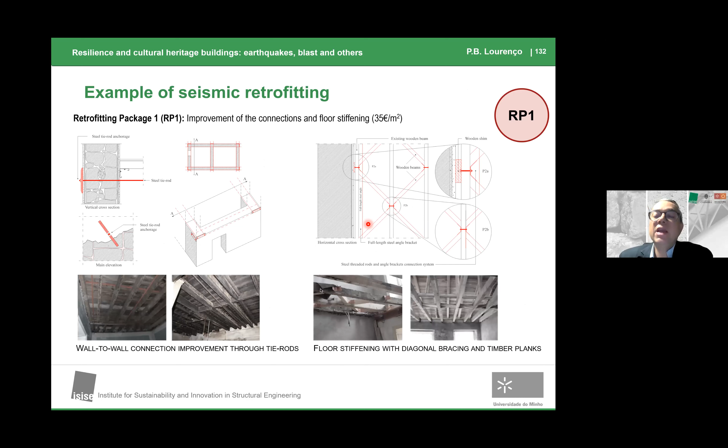We can also do these studies on designing and defining retrofitting packages, and then I can do the same. If I do a retrofitting, how do I change vulnerability? What is the consequence of using retrofitting package 1, 2, or 3 on the number of dead, the number of homeless, the number of buildings that collapse or are unusable?

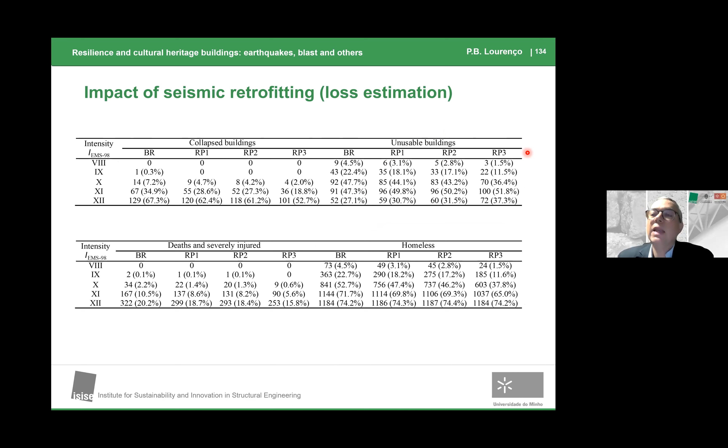You can say, I don't accept living with this risk, and because of that I'm going to put money. Or you can say, no, if I'm putting a dollar now, I'm going to use less money in the future, and then I need to do it because it's my responsibility to invest money to, let's say, spare money for the future. And this is a very important decision: do I accept to live with higher risk, or do I need to act now? We can also support emergency planning.

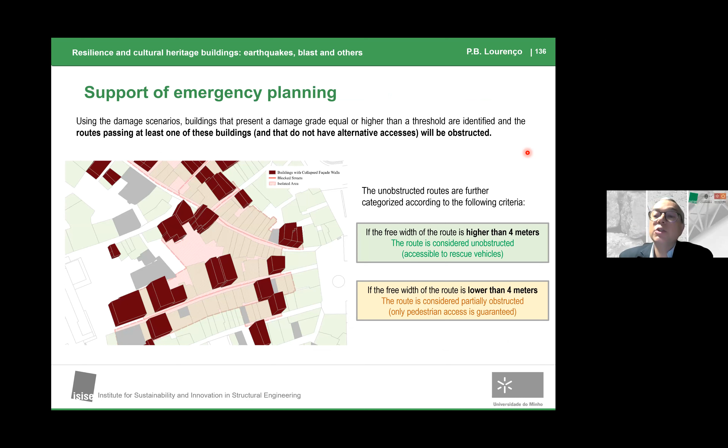For example, defining which part of the building or the city is not usable, which part of the buildings will collapse and I cannot access. If I cannot access, people cannot exit, and I cannot go there with the firemen, with the people, with the ambulances. So I need to have evacuation routes, and I can work selectively to reduce it, okay?

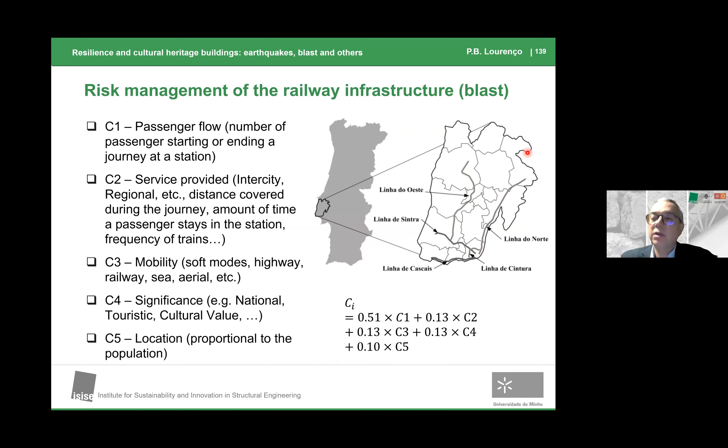And this is another example of addressing territory. In this case, it's the full railway infrastructure for terrorist attack, and we use very simple tools. I can define scenarios of attacks, I can apply a very simple risk approach where when I get a certain number, like I showed you before, it's not acceptable, I have to do something. Or if I get another number, I do something else, okay?

My last slide, I think I'm more or less on time. Well, conservation engineering is a very exciting field, as I tried to tell you. What we have built is around us. What we have built defines us as a society. What we have built is important for our economy. Any extreme event is a challenge.

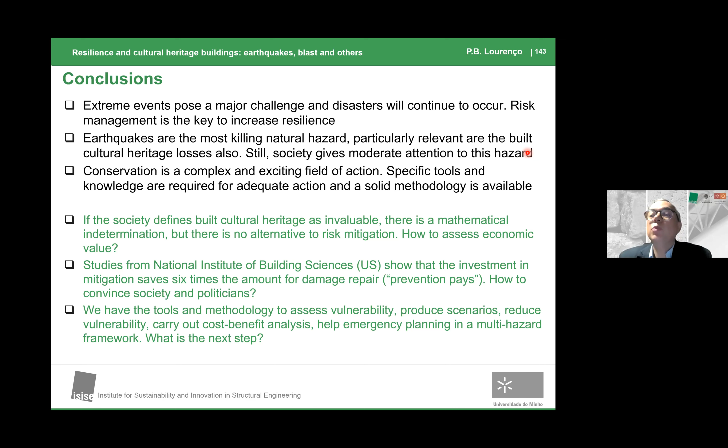We know it makes sense to put money to save money. How can we enforce society, ourselves, to put money to save money? Very difficult. The last point - because I'm assuming I'm talking mostly for engineers - we have all the tools now. How can we communicate properly so that people understand the simplicity of the problem and the complexity inherent, in order to be sure we have more resilient societies? Thank you very much, it has been a pleasure.